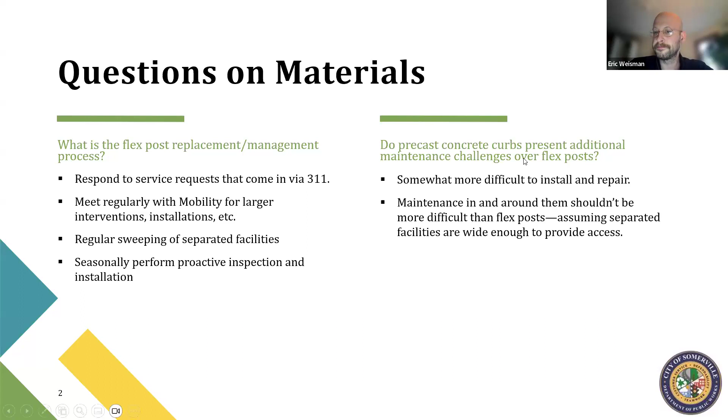There were also some questions about vehicles and vehicle safety. Do we have an idling policy for our vehicles? Absolutely. We observe the anti-idling law, but there are times we have to idle beyond the 5 minutes, or it's operationally helpful to have engines running for certain pieces of equipment that might run off the trucks, like lighting or emergency flashers. Often people are also out for extended periods in particularly cold weather, but we do discourage unnecessary idling. Any complaints we get, we follow up with staff to get an explanation of what's going on.

There was a question about the intelligent speed assistance. We purchased 8 devices this year. We learned the firmware needed to be updated, so we sent that equipment back. It recently came back, and we have installation scheduled with the manufacturer tentatively for the week of May 20th. That's a pretty solid date, though not 100%, and we're checking whether there needs to be any negotiation with the union before we actually do the installation. That's happening in the background because we want to meet all of our bargaining obligations. The previous trial was in an administrative vehicle, so that wasn't an issue.

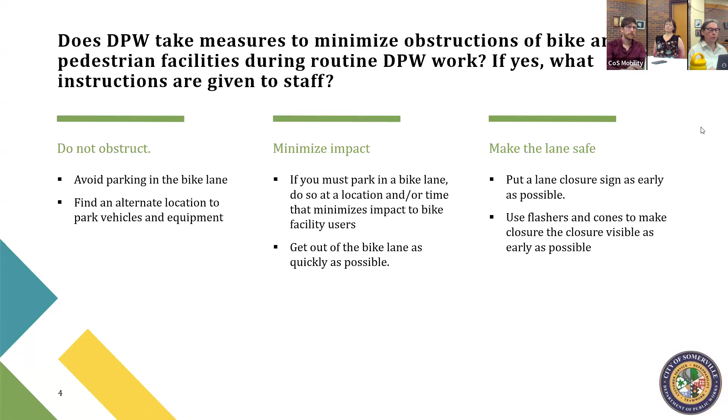A few areas were called out, Holland Street, which I mentioned - we've transitioned to parking on Winter Street whenever possible. Failing that, we try to park in the shared right turn bike lane. This is a strategy we came up with through consultation with the mobility department. We're also just trying in general to avoid busy times of day. That's a particularly challenging area because sometimes those barrels get quite heavy, so we're trying to come up with a way to minimize impact there and avoid parking in that bike lane, especially in that spot that blocks visibility for the crosswalk.

I didn't have so much context for the Marshall Street counterflow lane, but looking at that, I imagine that's when we're servicing Marshall Street Park and pulling over into the bike lane, the counterflow lane, and bikes are sort of forced around, like a trash truck or something like that. So we had a conversation with our trash truck driver.

So we're going to try to nose into the playground entrance if possible. There's like a plaza outside the playground where a small vehicle could be accommodated. The trash truck will try to park across the street if possible, but may take the full lane to preserve the counterflow lane. We also talked about the time of day to avoid rush hour, where there's more vehicles, more bikes, and so on.

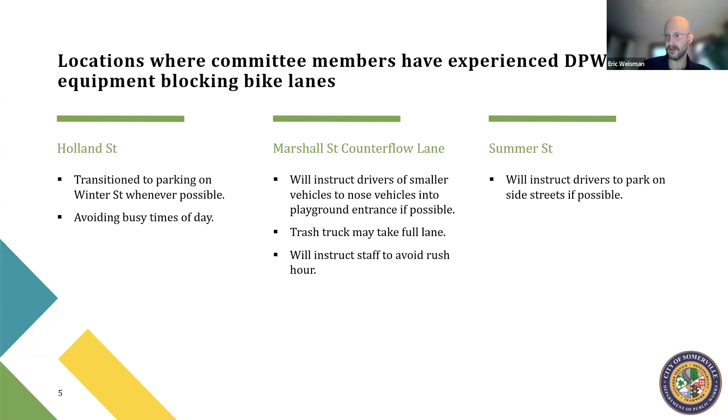So this was a great question: what can community members do to support DPW in prioritizing transportation safety?

We are committed to prioritizing the safety of vulnerable road users. I think we've done a lot in this regard. We provide training to all incoming staff, and it's something we talk about a lot. Anytime we have a report of somebody doing something unsafe, or we observe somebody doing something unsafe, it's absolutely something we follow up with.

Occasionally we need operational access to locations throughout the city, and I think that can be disruptive not only to cyclists but to pedestrians and drivers. We really do try to limit those interruptions, and we're trying to learn to do that more safely when we have to occupy facilities.

We've just recently purchased lane closure signs. I know the highway department is looking at more targeted bike signage for their dedicated bike vehicles and trailers. So again, we're trying to do what we can to limit those interruptions, particularly in situations where that could make a cyclist unsafe, but we occasionally do have operational needs.

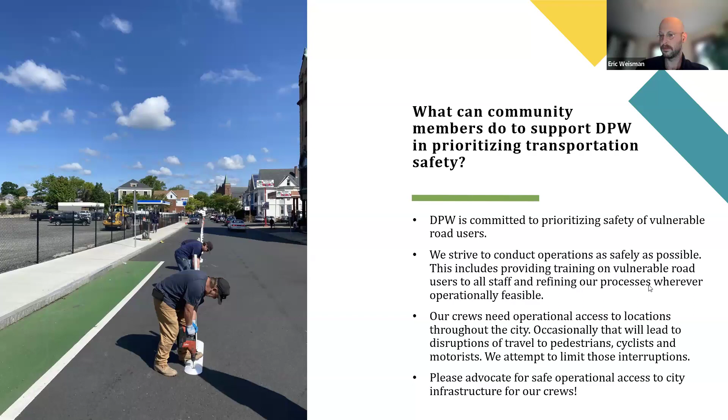Sure. So I want to clarify, there's two kinds of things I was seeing happening with DPW vehicles obstructing bicycle infrastructure and crosswalks. There's like a trash truck coming through. No one is upset about the trash, or everyone's upset about the trash truck, I can say, like 'oh it's in my way,' but you deal with it, that's part of living in the city. That's not a problem, it's kind of a temporary thing.

It's when you have a vehicle sitting there - and I'm the one who was reporting the one on Holland. There's probably like 100 311 tickets about it, because it was the same vehicle. I don't know if it was the same operator, because the operator was nowhere to be seen. They weren't hauling trash, they were maybe cleaning the park, who knows. But the truck was parked in a really unsafe way, time after time, I filed these 311 requests and nothing happened until I demanded to talk to Commissioner Lathan.

And that's not good, I don't want to waste our time, but that was the only thing I could do to get impact. And I think that's why you're here tonight, and I really appreciate this. There's a great learning process happening, and I'm really glad to hear it. I just want to make sure the behaviors that I saw are truly in the past. Yeah, so that one in particular is something, you're right - the person was stick picking the park, or debrising the park.

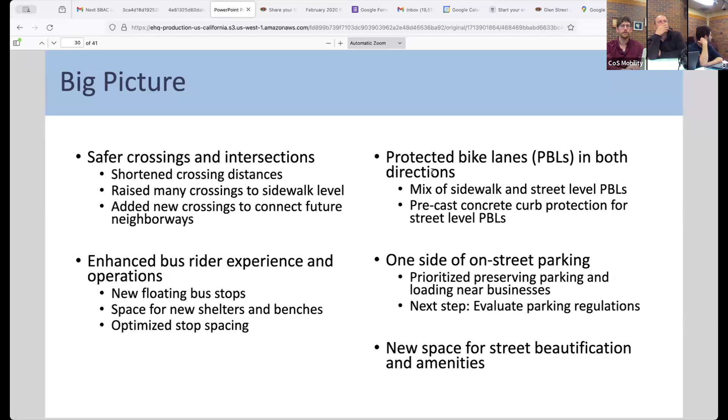Good, all right, so at a high level: safer crosswalks, faster buses, protected bike lanes, street parking on one side, and street beautification.

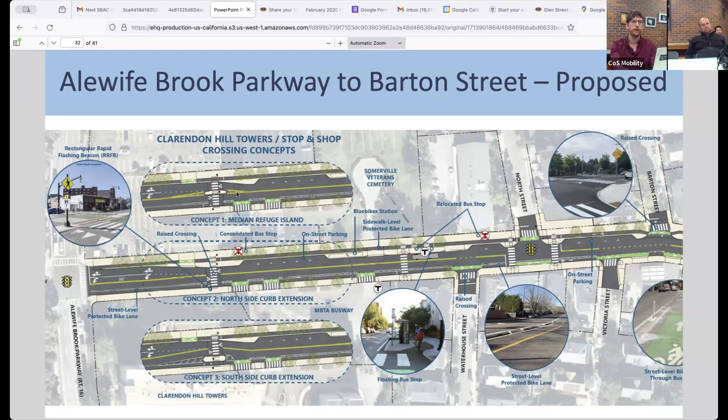As folks may have seen, the design on Broadway, going from Alewife Brook Parkway to just outside Teele Square, typically includes protected bike lanes in both directions, typically raised to sidewalk level on one side, behind floating bus stops, typically at street level behind precast concrete curbs or similar on the other side for most of the area. There are a few sections overall where there are several different possible concepts proposed. Definitely interested in members' take on which concepts we prefer. There are other sections, but I think that's relatively typical overall.

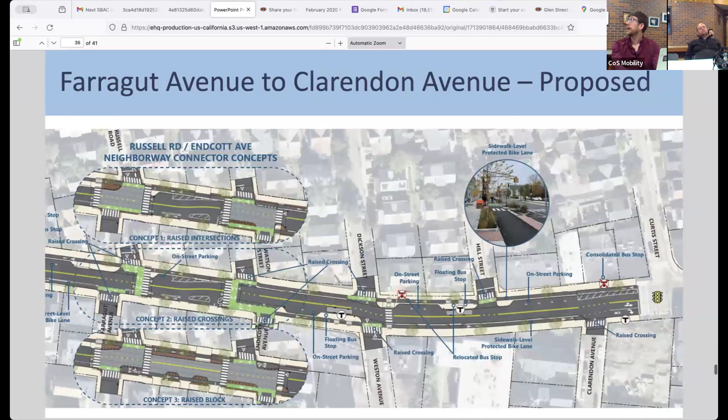With that, let's open up the discussion. Any particular items that members want to highlight, or any preferences? We can certainly keep talking, but if anyone else wants to go, start us talking. Can you go back to the other slide that had the three options?

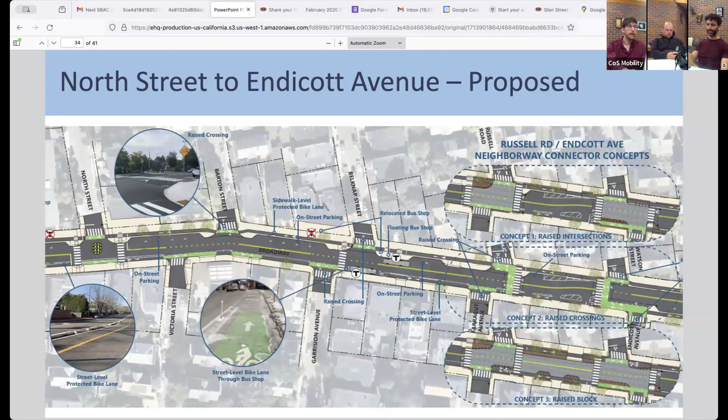Yeah, or is it easier to have this overall kind of zoom in? Yeah, that's fine. Over on the left side, the 3 options by the Stop and Shop.

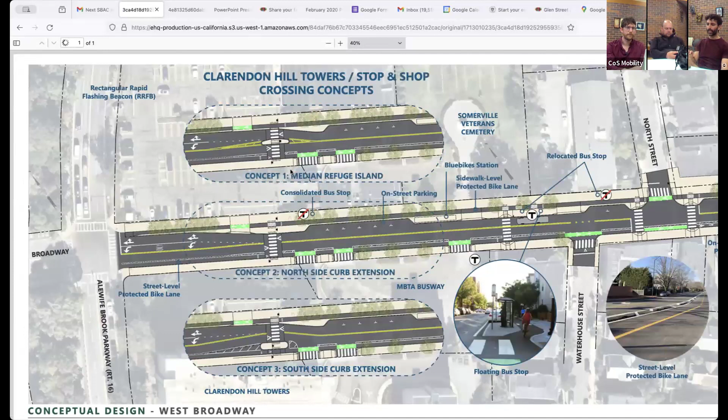One thing I noticed is that the only option I think is really safe is concept 2. The reason is you've got the downhill bike lane, so you have 2 lanes of traffic that could be moving fast, or worse, the bikes are going and the cars are stuck in traffic. Allowing a spot for pedestrians to safely wait between lanes of traffic makes a big difference versus the other 2 options, where there's no space to wait between the general traffic lane and bikes. I hope people respect pedestrians in the crosswalk, but it's easy for a pedestrian to leap out from behind a car, from the perspective of a cyclist or motorist. Giving pedestrians a safe refuge island there makes more sense than putting it on the south side, where cyclists are generally going slow uphill. So that one really stuck out at me.

I like that there were the 3 options, though. I wouldn't have noticed it if you hadn't presented options — I would have just said, oh, I guess that's the way it is. But as soon as I saw the option, I said, oh my gosh, this is a really big difference.

Gotcha, making sure I'm capturing that correctly — you're suggesting strongly preferring concept 2, for similar reasons to why we'd be skeptical of 2 vehicular travel lanes in the same direction at higher speed.

Okay, I saw hands from Ted, and I think one from Mark as well. Yes, I realize we're talking about this segment — I had some more ideas there, but I generally agree with Ian. I think I like the concept 2 design as well.

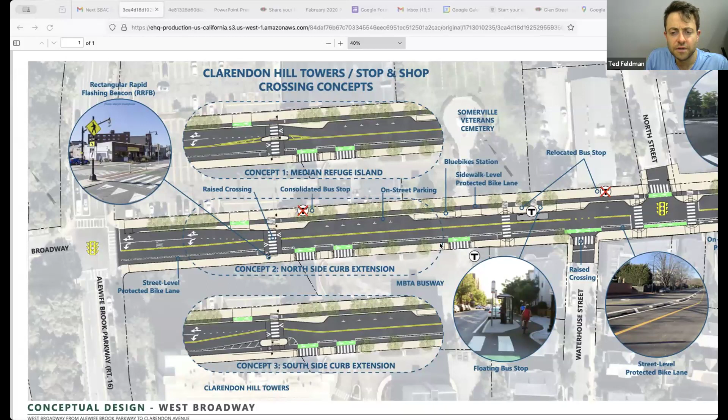Any other comments on this general area with the westernmost project area?

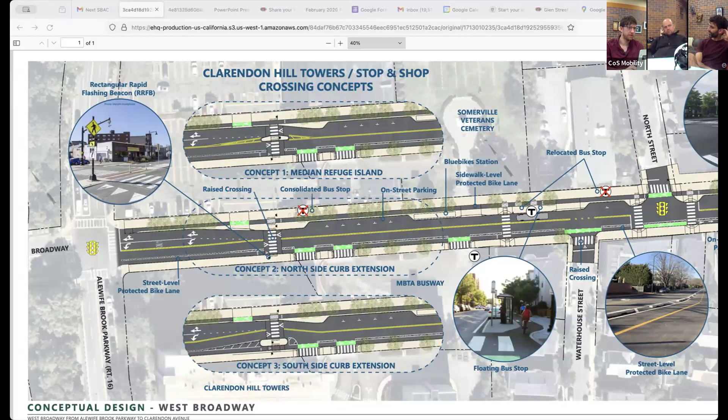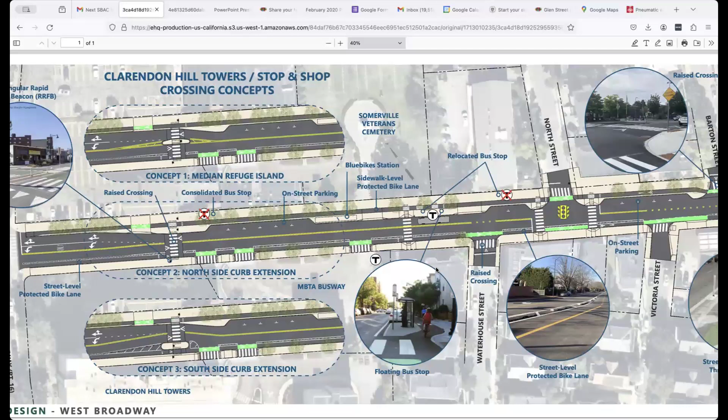It's a kind of a different committee, but we do have a fair amount of trees, not elderly trees, but trees nonetheless along this path. What's happening to them? It looks like the bike lane's gonna be right there. There will not be any trees removed as part of this project unless they're dead, but all existing trees will be maintained, and we will be looking for opportunities to add new street trees.

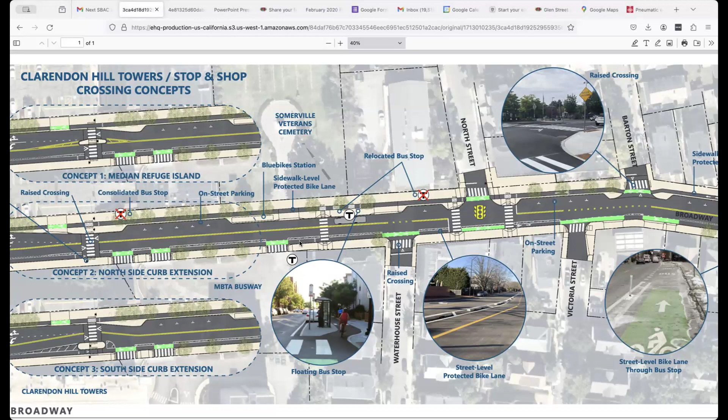So, like right by the crosswalks where we have the 3 options, are the trees depicted on the building side or the road side? Because right now they're inches from the curb. And if we're moving parking, are we moving parking? Maybe another way to think of this: is the sidewalk curb line moving, or are we putting the bike lane right up against where the current curb is, with more stuff in the street? Is anything on the sidewalk staying where it is? Yes, everything - the sidewalk widths are not being narrowed at all, so any bike facilities will be taking space that is currently road or parking space. Good to hear.

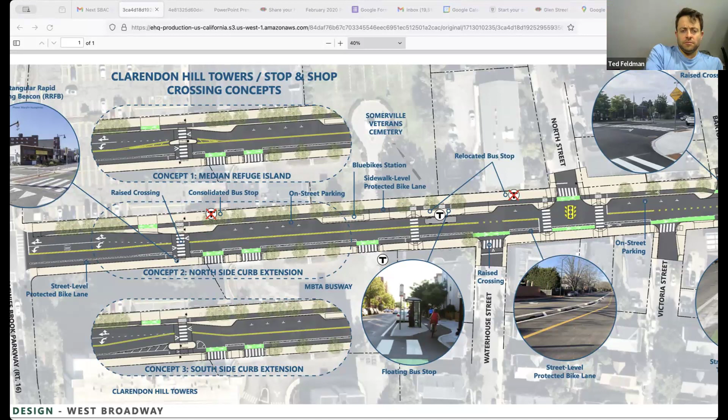I have a quick question, sorry if this has been covered before, but is any coordination being done with Arlington? Because there's 2 lanes of traffic on Broadway, just on the other side of the Parkway, and sometimes I've seen cars essentially merge into the 1 lane that Broadway becomes. So I don't know, is Arlington planning to redo their streets as well, because I just feel like it might be unsafe.

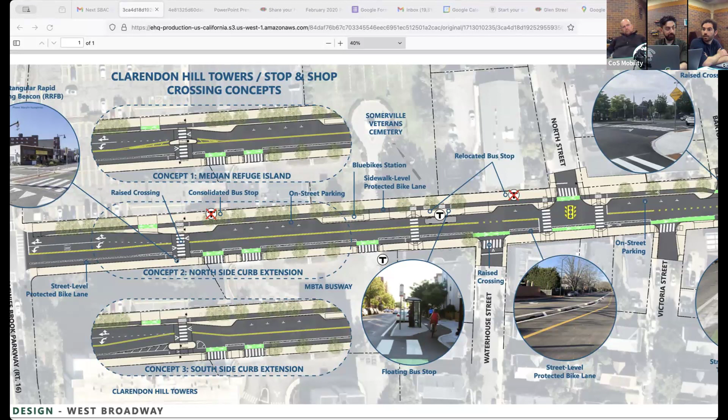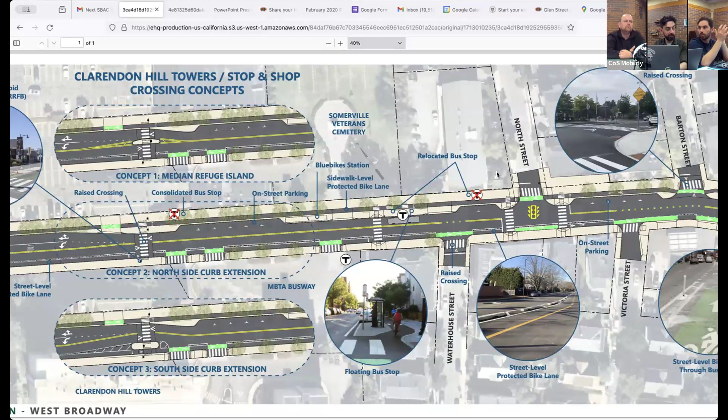Yes, we have been coordinating with Arlington, especially at the intersection, and Arlington is in the preliminary stages of trying to get some work done on their section of Broadway. An advocacy group has put out some proposals, and the city hasn't begun a formal process yet, but I know they are looking to make some similar changes to what we're proposing on the other side of Broadway.

And also, from the chat, Gregory is suggesting a no turn on red signage at Alewife Brook Parkway. Anything else in this area?

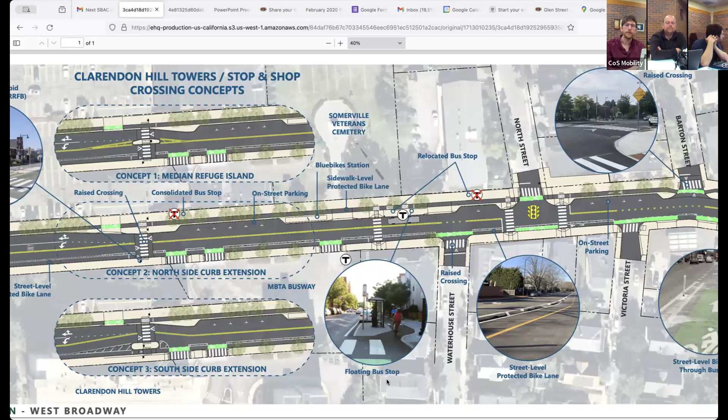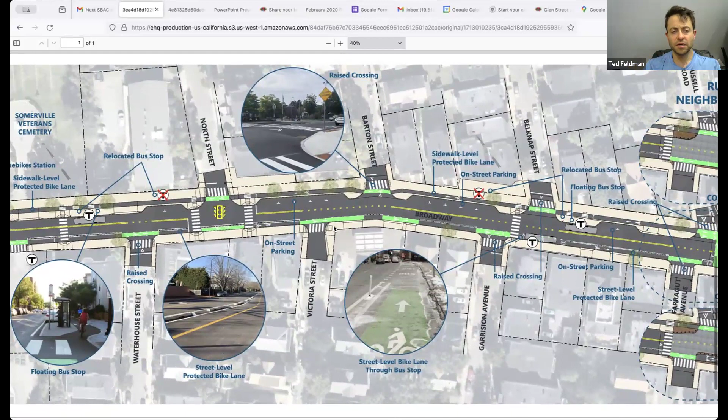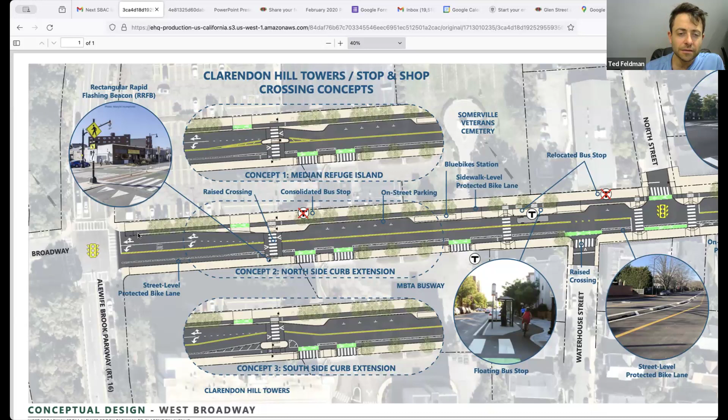Moving eastwards a little bit - actually I had one question, a point of clarification, Tom. Just at the very end of the Route 16 Broadway segment, is that just a painted on bike lane before it looks like where the concept starts? And similarly, does it merge to just a striped bike lane on the side approaching Alewife Brook Parkway as well, after the median, or is that street level? Okay so it's a PBL - there's no existing bike infrastructure there at all. What's the plan there? It looks like it becomes a PBL going uphill towards Clarendon the whole extent. There was a graphic that showed precast curbs, so maybe the question is, are there precast curbs from Route 16 all the way to Teel Square on the south side of the street?

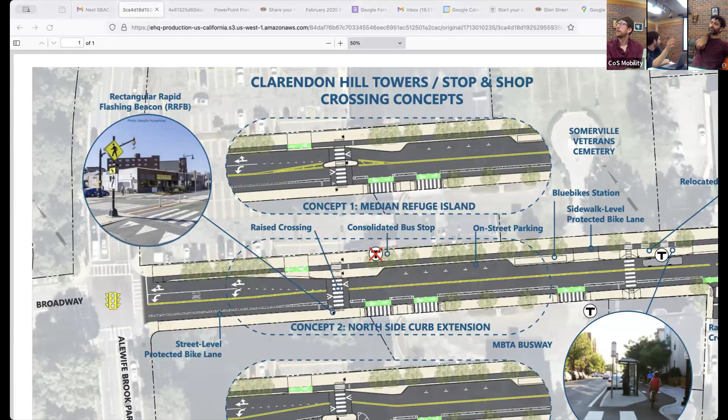So if I'm understanding the question, the eastbound direction on the south side, what's being shown on the section that's on the street now, that is all protected, proposed to be protected with precast concrete. Further east, these plans show a transition to a sidewalk level protected bike lane. Does that answer the question? Yes, it did. Thanks.

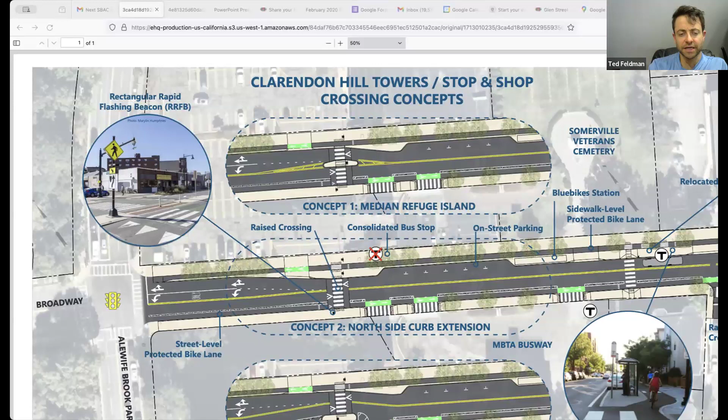If you didn't have hard protection right at the intersection, motorists are just gonna run down those flex posts real fast.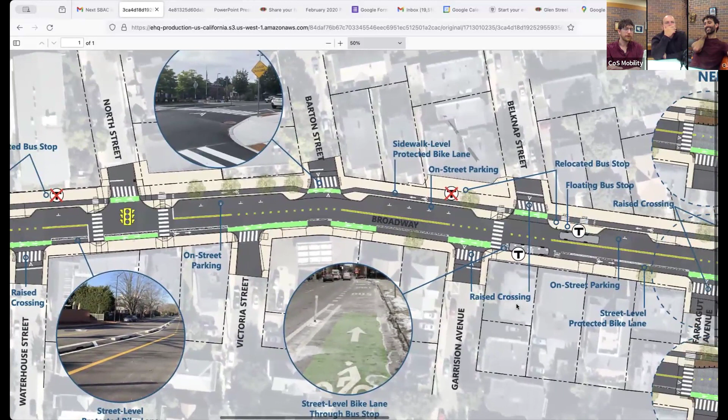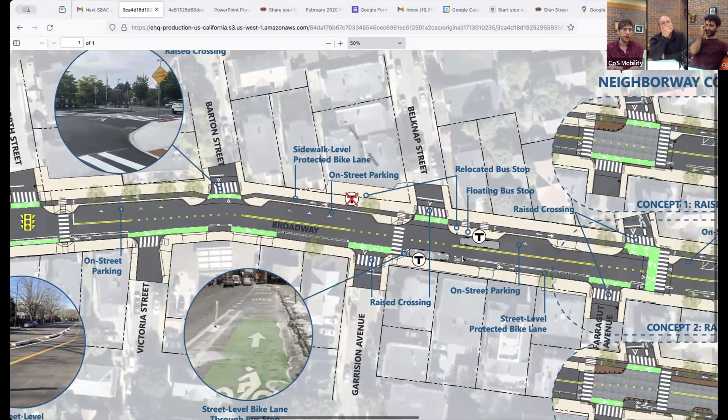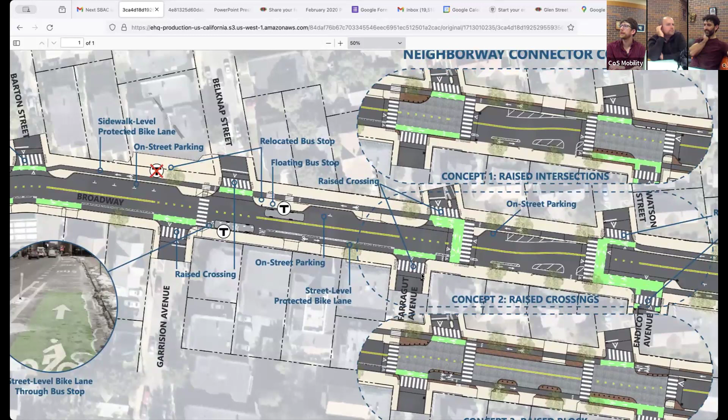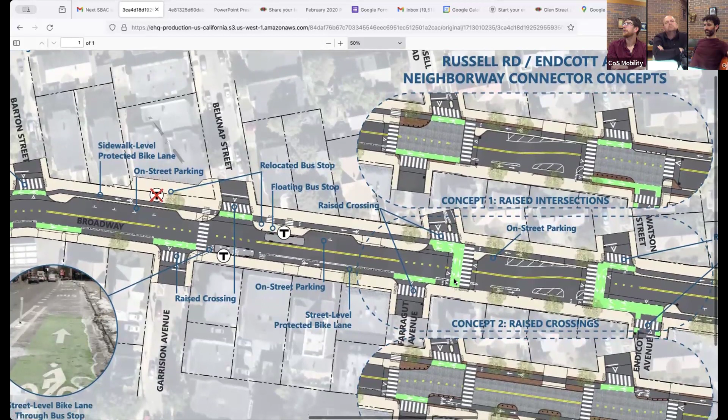Moving further east, past North Street with a signalized intersection and some generous bump outs. We have an interesting crossing here, linking some quieter streets, neighborways, with various configurations—either intersections at each of these 2 streets, or raised crosswalks and cross bikes, or an entire raised block beginning just west of the two intersections and continuing raised at sidewalk level all the way to the east. Is that correct, staff? That is.

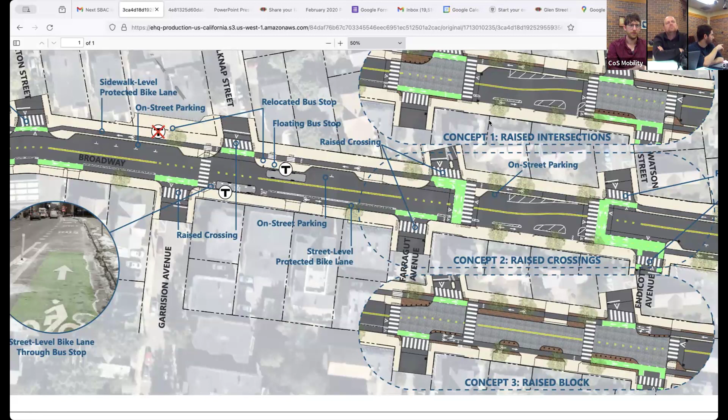Questions, comments about this section and these concepts? To give a little additional context, Endicott Avenue in the southeast of the plans and Russell Road in the northwest are future neighborways in the bicycle network plan. We've prioritized this block as an important connector of those two neighborways, recognizing that anybody wanting to continue through is going to have to do a little bit of a chicane, or whatever you want to call it, on this block of Broadway.

What's the protection in those two spots? Is it curb separated on the bike lanes? What we're showing in concepts 1 and 2, the westbound is sidewalk level curb separation, and the south side eastbound is shown as precast concrete. In option 3, everything would be raised to sidewalk level, so bollards would be used to separate the bike lanes and the roadway.

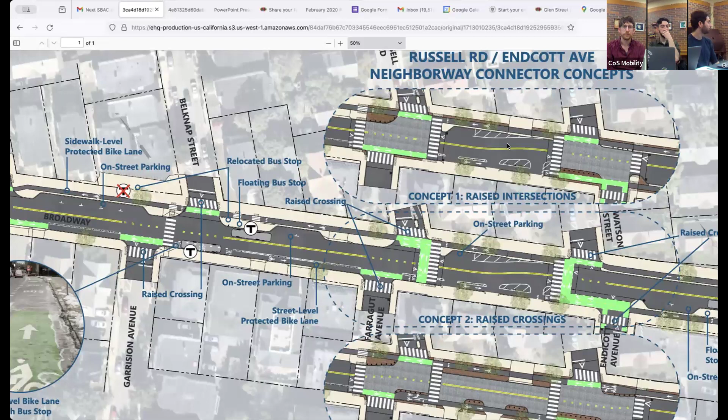I'll share a reaction that I had, curious for others' thoughts. I was a little skeptical of concept 2 with just the raised crossing—I was worried this might be too sharp of an angle for a bike to tightly navigate coming up Endicott, going through this brief 2-way section, and turning sharply at various points, potentially confusing if somebody tries to turn slightly too early onto the raised section of the cross bike.

So for that, I liked either of the more heavily raised options. I think I prefer concept 1 of raised intersections, because I worry that if the whole section is raised, it no longer feels calm for cars since they've already gone over the raising. I understand it would be a different material, and if it's actually nice dense bollard, that might be fine. So I don't feel strongly between 1 versus 3, but I don't like concept 2 as much.

With concept 1, it looks like the westbound bike lane is sidewalk level and the eastbound bike lane is street level. Even between the 2 raised intersections, could both bike lanes be raised such that cyclists are not going up and down and up? Like on the cargo bike, that is a real pain. Certainly not the end of the world, but I figure I should ask.

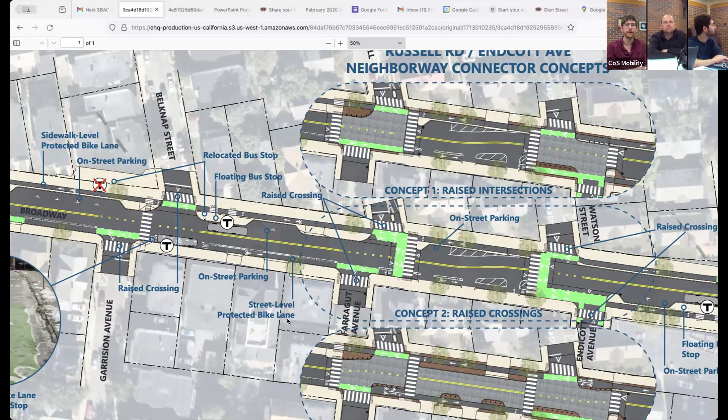Gregory, go ahead. I was just curious, is there a reason for not having Farragut be the neighbor way so that crossing could be potentially simplified by avoiding the zigzag on Endicott?

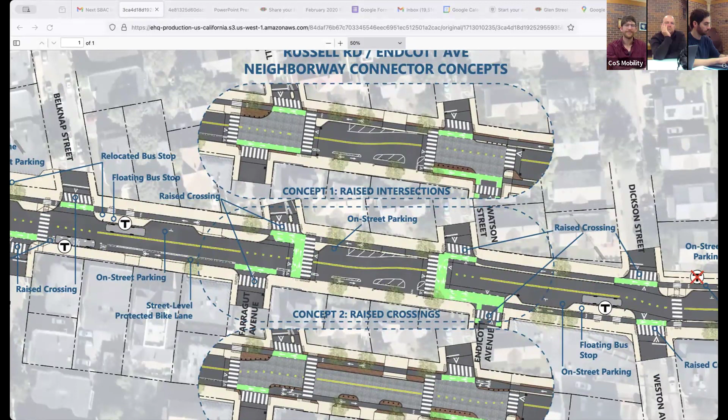So Greg, that's probably a network question, and we work really hard to create a network that works overall. I believe Endicott gives you better connection on the other side, towards south of Broadway.

I don't know if this was factored into the network, but there's also that large field on Endicott, a park down there. Does it matter that Farragut is a one-way away from Broadway? Not necessarily, it was more about connecting larger connections, schools and open spaces. Okay.

And to clarify, all neighbor ways in the bike network plan will be two-way for bikes. Okay, yeah, I thought that was the case. I couldn't remember if that was COVID only.

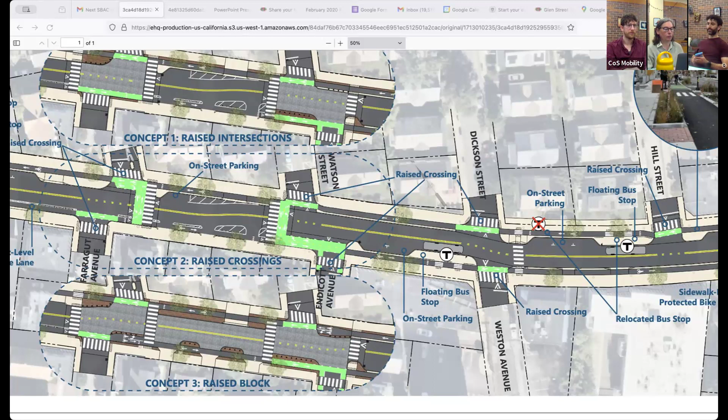Right, anything else from members? Let's scroll a little further to the east, making sure we're including the intersection at Teal Square. Any questions or comments on here?

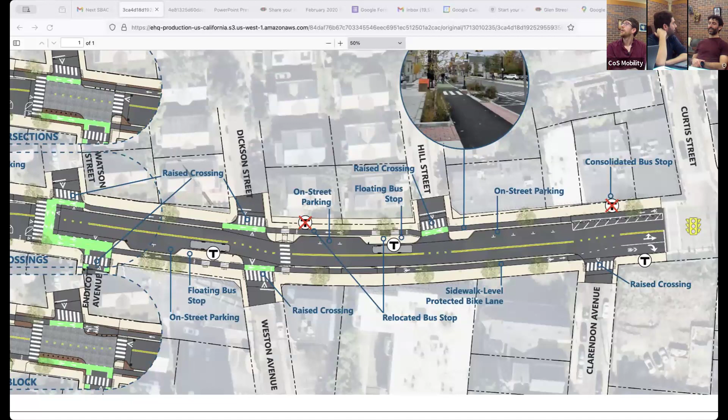Ian asks: can we get rid of the right turn lane at Teal Square and just have a bike lane go all the way through? We can't get rid of the right turn lane, just one lane of traffic, similar to Ellwood Parkway.

As part of this project, we won't be able to make signal changes at Teal Square, and right now the right turn and the through movement are separated at the signal. There's a phase where they're both green, but the green arrow for the right turn stays green much longer than the through, and that's actually really helpful for bus operations, for the bus turning.

The bus isn't going to fit through here though if there are three cars waiting in the right turn lane. It's a really short right turn lane already, so if there's any amount of traffic waiting to go straight, the bus and everyone else is stuck behind that traffic. I realize I'm being really nitpicky here.

I do really like this design, I also just know that people are going to do dumb things if given the opportunity, and this design is allowing too much to chance, I think. So we do have some extra buffer space on the north side, and we can look at what we can do with that space to maybe fit in a bike lane on the south side of the street. But I don't think it's going to be possible to change signal timing as part of this.

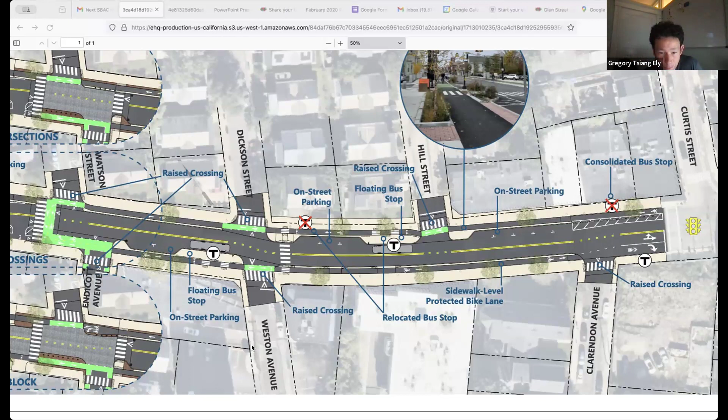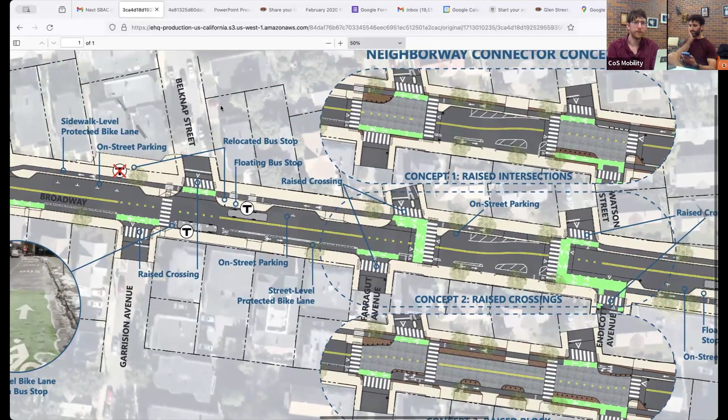That'd be mine. Yeah, so just on the corner there, I think we missed that section from the scroll from one side to the other. Yeah, we can take a look at what's possible.

This is a tricky section because of the road width. We can't have two floating bus stops right across from each other because there's not enough width then for the protected bike lane. The challenge with floating bus stops is you have to chicane the road, and it has to be enough length to safely taper the vehicles. So we were struggling to find a location that worked here for the floating bus stop, but we can keep looking at what is possible.

If you all have any suggestions for what the lane width is there - the standard lane width for vehicles? The travel lanes are 11 feet, I believe. That sounds about right for the bus. Well, buses - Webster is 10 feet. Yeah, they can go less, but MBTA has always said they prefer 11 feet.

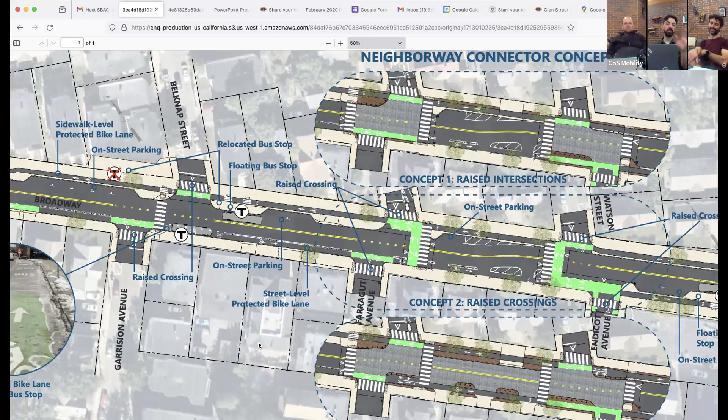My question is more like, if we're trying to figure out how we put a bus here, I want to make sure that there's actually a bus there. Fair. Yeah, the 87 at least will still be here. I think I was - yeah.

Yeah, so for this bus stop, let's always note that as a conflict, even if we don't have the exact answer.

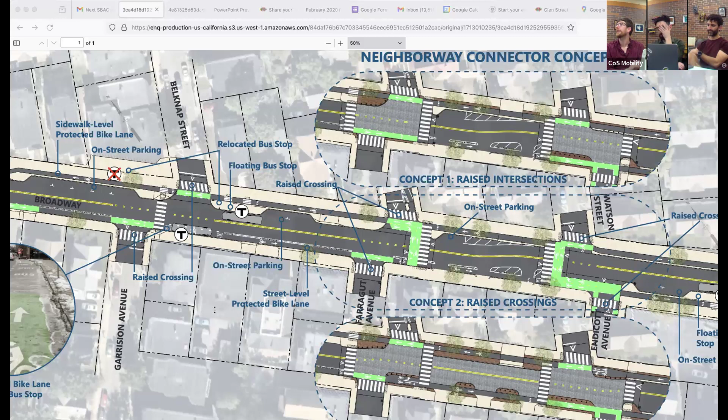Gregor, can you clarify your comment about the intersection at Teal and removing the buffer? Would the idea be a bike lane to the right of the right turn lane, or between lanes? I would say to the right of the right turn lanes, because I think that's a more common bike movement now, particularly with Holland Street being completed.

Gotcha. So the idea is that we're emphasizing the bike movement turning right onto Holland Street, since that doesn't have any conflicts with right turning cars onto Holland, and that connects you to the nice bike lane on Holland. So it'll be like a right turn only bike lane.

Yeah, I think there's also opportunity to be creative with Teal Square in the future to zigzag bikes through there, but...

To Ian's point earlier, the right turn light is a single light, like an add-on to a column. So literally just blacking out that single light would solve your right turn phase.

In that case, then I would strongly suggest we advocate that there's a single protected bike lane that runs the whole course, basically from Alewife Brook Parkway all the way to Davis, without a gap.

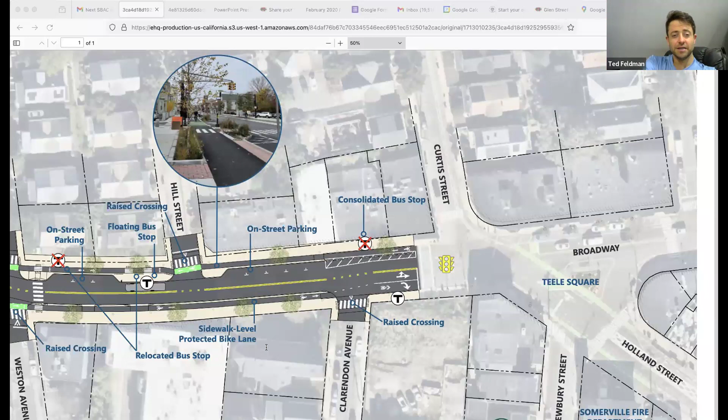I think we've been talking about plans on this stretch of street since like for as long as I've been on the bike committee, so maybe 2017. So kudos to see this getting realized.

And I share Greg's idea about paring down the buffer on the north side there a little bit to make room for a bike facility. Things missing at this intersection, maybe a bike box for both the straight and right turn lanes.

Regardless of whether or not the full bike lane is feasible, I do think this is almost equally, if not more dangerous at an intersection, more so if you're approaching it. It's out of scope of this project, but something to consider.

And I don't have a perfect solution for the other problem that I see, which is Clarendon Avenue, and maybe raising awareness that there are bikes there.

That tends to be a turn that cut-through traffic going to Mass Ave takes at a fairly high speed when possible. So I think anything that can be done to de-incentivize that left turn, or that left turn at high speed, would be great.

So I don't know if the design implication is just relying upon the width of the buffer and the slight chicane there to do that, but that's something I see, or if it's just sort of the traffic itself will help mitigate that, but that's another trouble spot.

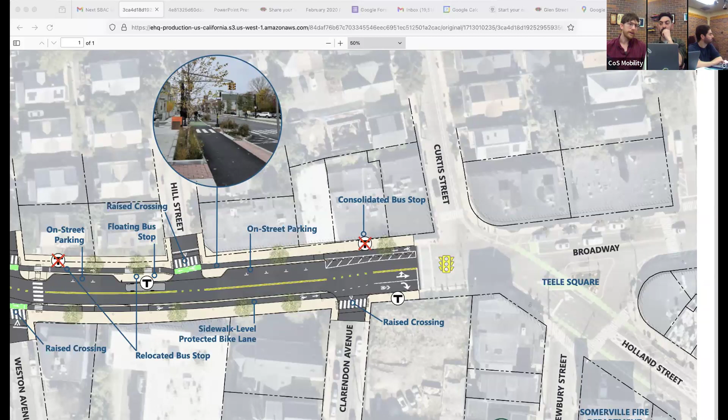As I read before, Zachary mentioned Russell Endicott concepts 1 and 2, possibly to have the raised crossing intersections with the sidewalk level bike lanes on both sides for that section of Broadway. And he clarifies the sidewalk level bike lanes on both sides instead of just the north side. So for the screen, we'll have to move over to the left to see the Russell Endicott concepts for clarification.

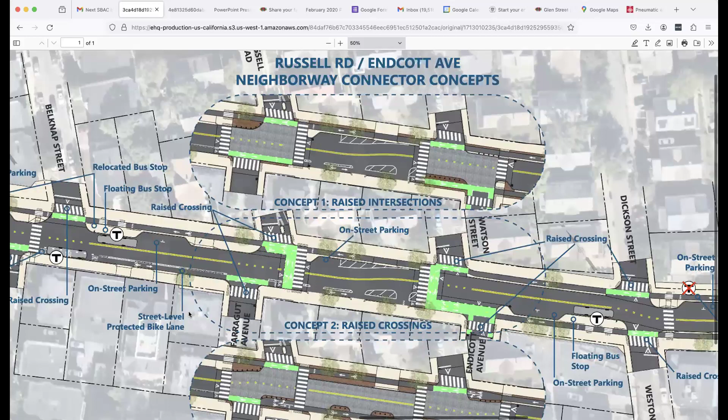So I think this is a question to the city. Is it possible for concepts 1 and 2 to keep the raised intersection, to raise the bike lanes on concepts 1 and 2 for the south siding? I'll say, I think that is similar to something that we're capturing in our committee comments, that suggestion overall.

Any other questions in the Q&A? Yes, Joe Paul talks about Gregory's comment, and we're now talking about Teele Square, about taking this buffer space on the north side so we can extend the PBL to Teele. They mentioned that at a recent meeting, they said they can't do that because of the bus stop there. There is a bus stop there. I think that's up to the city and engineering to figure out whether you can move the bus stop or make sure that the protected bike lane, if we can get it through Teele Square, works with it.

In the comments, I also made a different answer to that, is that we could possibly make a shelf, I don't know, Cambridge Street has it by the new library. It's a shelf that you continue riding on as a bike lane, and the bus can easily go up the curb, kind of like what we have with a curb situation at Beacon Street. And that is it for Q&As if no one else has anything.

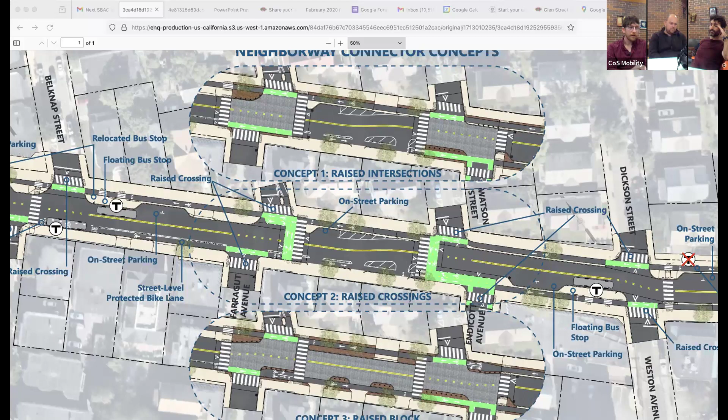Thanks, Mark. I did have a couple of quick questions. Go ahead, Ted. Yeah, I'll just note time-wise, definitely want to hear comments, but I know we're over, so I'll do this quick.

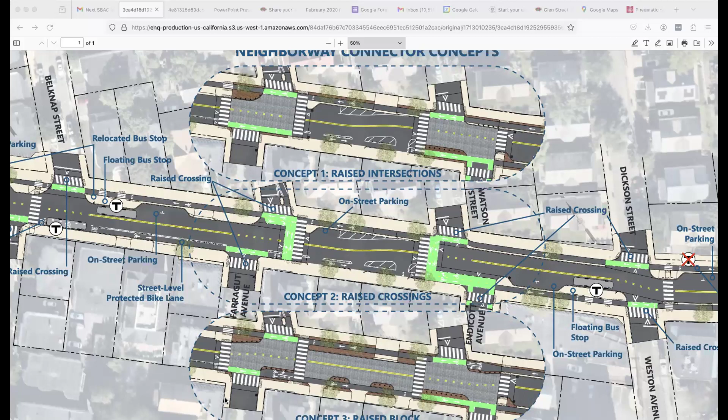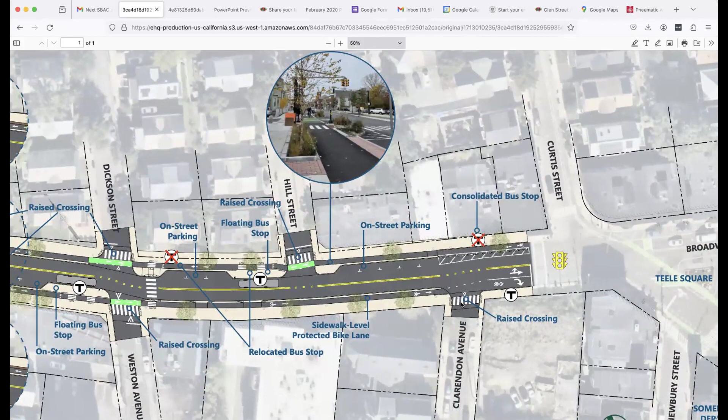To a point that Greg put in the chat, if possible, could the cross section be raised by that Clarendon Ave up towards the Teele Square end? Tom, if you can scroll over. If that could also be raised, or at least that side street crossing there, either if the Clarendon Ave sidewalk was raised, that would at least probably reduce car speeds, or if that entire intersection could be raised, that entire strip be raised there, that would probably be a safety improvement for both cyclists and pedestrians crossing the street. That was Clarendon Ave. To clarify, it does look like that crosswalk would be raised, but I think we can also note this intersection as a concern.

I think just to make clarification of something I heard earlier, I believe this is currently a public comment period in which the city is gathering feedback from multiple city committees in addition to some ongoing public comment period directly. Is that correct?

Yes, we're currently in the second public feedback stage of this project, and in our city update we'll talk about some of the upcoming opportunities as well as some of the outreach events we've already done.

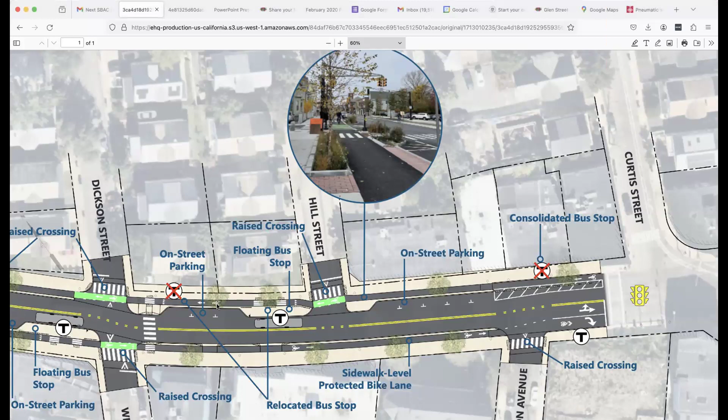Do we have a city website we can put in the chat on this project so they can view other areas where they can participate if they feel like it? Yeah, I can try and dig it up. Thank you, I can put a link to the chat later.

I got it. Do we want to make a vote on this? Yes, thank you for the suggestion.

I will briefly recap the main points that I have, and we move to a vote to submit a comment making those points. We strongly support this design overall. Regarding the intersection at Alewife Brook Parkway, I'll give you a copy of this in a minute, Alex. We're very concerned about the intersection overall.

We suggest working with DCR to continue the bike lane to the intersection. In the short term, we suggest working with DCR to add a bikes-may-use-walk-signal and no-turn-on-red sign at Alewife Brook Parkway. For the westernmost unsignalized crosswalk, we strongly prefer concept 2, the northern curb extension.

So pedestrians have space between downhill cyclists and the vehicular travel lane, and we suggest following in again from PTAC on that crossing.

For the Russell Road and Endicott Avenue neighborway connector concepts, we worry concept 2 would have overly sharp turns. We prefer concept 1 with the raised intersections, and we suggest raising the bike lane in both directions to avoid a roller coaster.

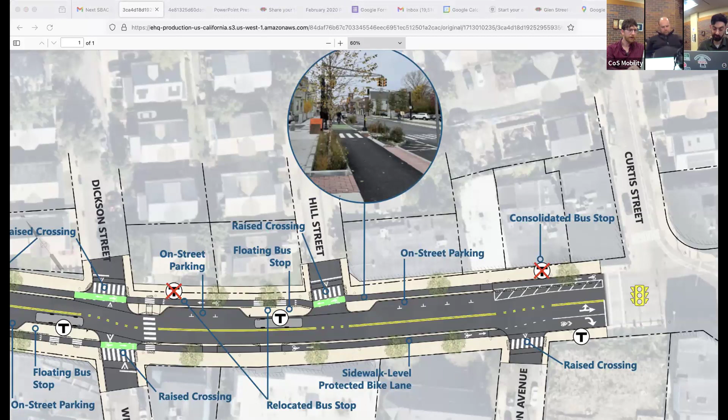Tom Lamar, aye. Lena, aye. Ted Feldman, aye. Gregory Ely, aye. Alex Frieden, aye. Mark Bollinger, aye. Ian Woloshyn, aye. Did they freeze? Abstain. I think the city froze.

All right, that concludes the vote. The comments were endorsed and I will submit those to the city. With that, I will hand it over to the city update. I do not anticipate any further votes in the committee at this time. Knowing that we are behind schedule, I will leave at the city's discretion any items that should be postponed. I think we can run through this pretty quickly.

Update on our member recruitment: we have made offers to 7 new members who have accepted and gotten the recommendation of the mayor. Next steps, we need to seek city council approval, which we are hoping to do next week. Following that, the new members will need to be sworn in by the clerk's office. Once those steps are completed, there'll be new members, and we're hoping everyone can be on board for our meeting in June.

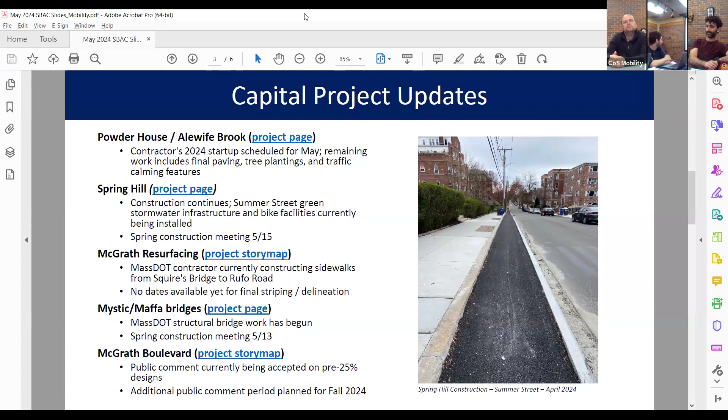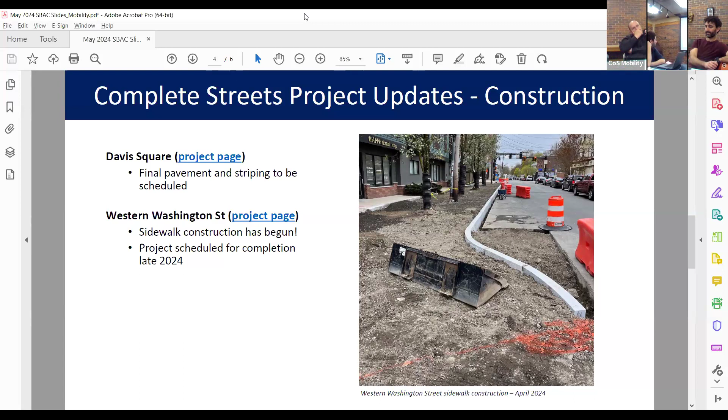For the city's complete streets projects: Davis Square has no updates from last month, but the city is working to schedule the final pavement and striping there. Sidewalk construction has begun on Western Washington Street, and the project is scheduled for full completion before the end of 2024.

Upcoming, we have our feedback survey, which is open until the end of May. We currently have scheduled outreach on the street itself, a pop-up on May 14th in the late afternoon at North Street. We'll also be holding a pop-up at the Clarendon Hill Towers to engage particularly with the residents who live there.

We've done a number of public outreach events already, including a kickoff open house on April 13th at the West Somerville Neighborhood School, a walk with PTAC, and several other tabling and virtual opportunities.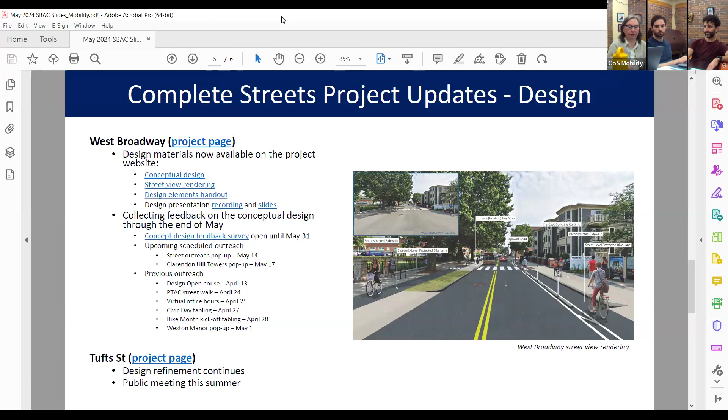Okay, should we wrap it up? For Tufts Street, we finally got the soils report, so we'll have to look at that. But so far it looks good, and we're continuing the design. We're hoping to come to the public sometime this summer and show the latest design.

For Glen Street and Otis Street neighborways, we're working closely with the two consultants we got through the ARPA grant. I was hoping to have a bit more to show today, but that wouldn't have been enough time anyway. The goal is that sometime in May we'll update the website, and then we can have a conversation at next month's meeting.

One question on the community path: I saw the ramp by Joy Street is mostly done but still fenced off, is there a date on that? We've been hearing imminent, the MBTA has to do the sidewalk, the developer has to approve it, and then the city also has to approve it, so we're all like, what's going on? It will happen sooner than later. There's still some slight grading issues, and maybe a railing that isn't entirely safe.